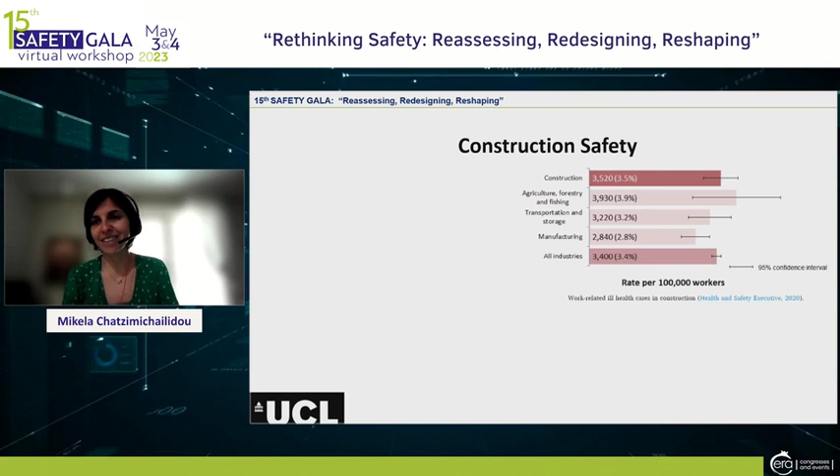Unfortunately, and this is why us safety engineers are very useful really in this industry. Some facts: compared to stick built, which is the traditional way of building residential buildings, modular construction has environmental, economic, and societal advantages. It's a very different way of building, more like a manufacturing process rather than the traditional construction process. Of course, as with everything in life, it comes at a cost, in the sense that any innovation should be considered from a safety perspective.

Because it may introduce some safety risks. Another fact I came across during this analysis, published by the United States Bureau of Labor Statistics, says that unfortunately there is evidence of increased injuries and fatalities in the US modular construction industry, which means that while it may bring major advantages, it also needs to be considered from a safety perspective.

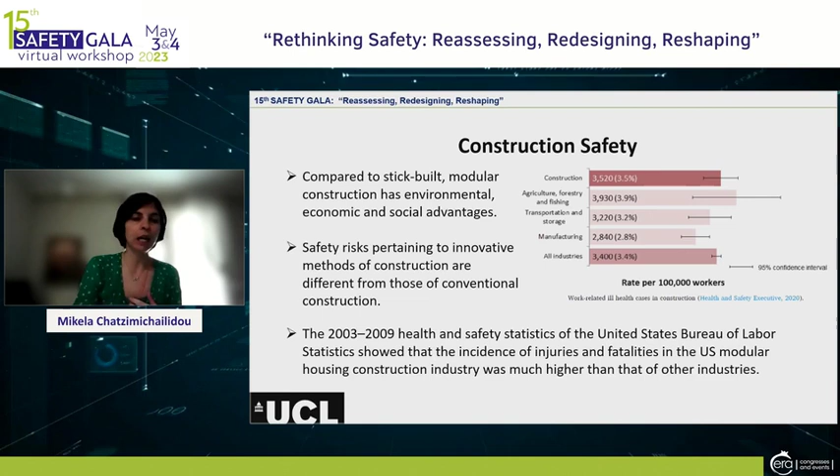And this is the main reason why we did this analysis at UCL. Touching on modular construction, as I said, it's more like a manufacturing process, like a production line. Consider it as Lego pieces: you produce a module, and by combining it with other modules, you can create all sorts of different buildings and layouts.

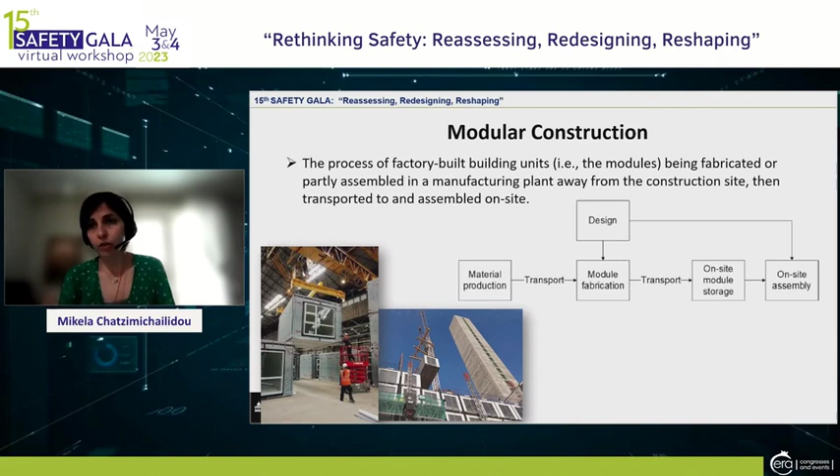There is a general process, though of course processes may vary from industry to industry, from country to country. A very generalized process, which you can also find in the paper, is presented on this screen. As I said, it's a typical production line process: you have the material production, which is then transported into a plant in order to fabricate the module, the entity which is then used as part of the production process to create the final building.

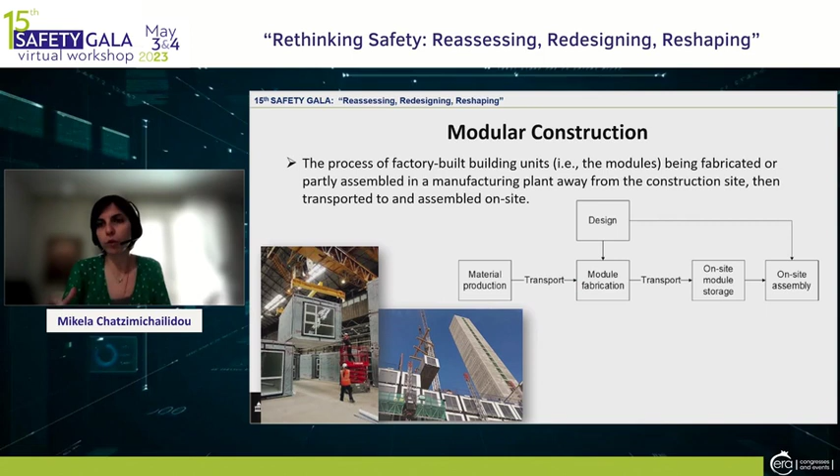And of course, you have design at the top of the whole process, which leads the entire process from a digital perspective. Building information modeling is a very extended topic in its own right, so I decided not to say much about it. I know different specialists in different industries experience it in very different ways. The only thing I want to highlight is that it's not only about CAD designs, because many people unfortunately tend to oversimplify it.

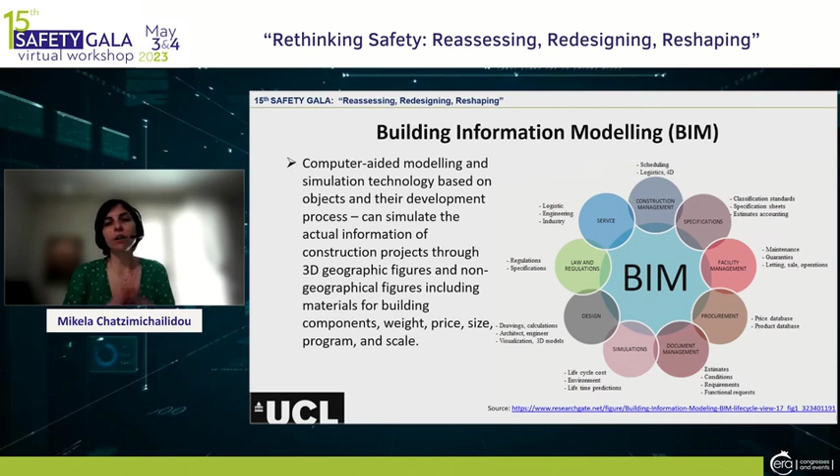It's much more than that. As you can see on the right-hand side, it encompasses laws and regulations, design, simulations, document management, anything really related to the production process of a modular building. And it's obviously computer-aided modeling, so keeping this fundamental about it.

So why is it so important? I already touched on why it's important to consider BIM safety management in modular construction as a topic of interest. There are a number of papers in the academic literature, as I mentioned, that consider the use of BIM in modular construction. Then they consider the use of BIM in safety management, and as a third, separate topic, they consider safety issues in modular construction. But they never consider those three together, which is actually where the power of BIM can be highlighted, because BIM can actually be used to remedy, to mitigate safety risks pertaining to modular construction.

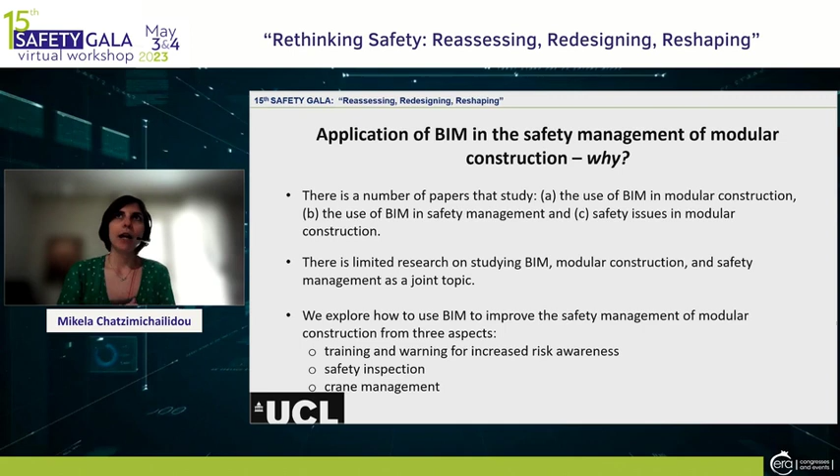As you can see at the bottom of the screen, from this literature review we have identified three major areas where BIM can contribute to modular construction. The first is training and warning for increased risk awareness by the building workers. Safety inspection, where we go on site, for example where the building starts being created, and run inspections with the support of BIM. And then crane management, which is another area with high safety interest.

So let's try and unfold all three separately, and I'll make a quick recommendation by category. First, training and warning for our workers. Offsite production of modular buildings, meaning while it's still in the plant during the manufacturing process, requires workers to master a completely different set of skills. It's not like the traditional stick build, so they need to upskill themselves around new skills in order to be able to produce modular constructed buildings.

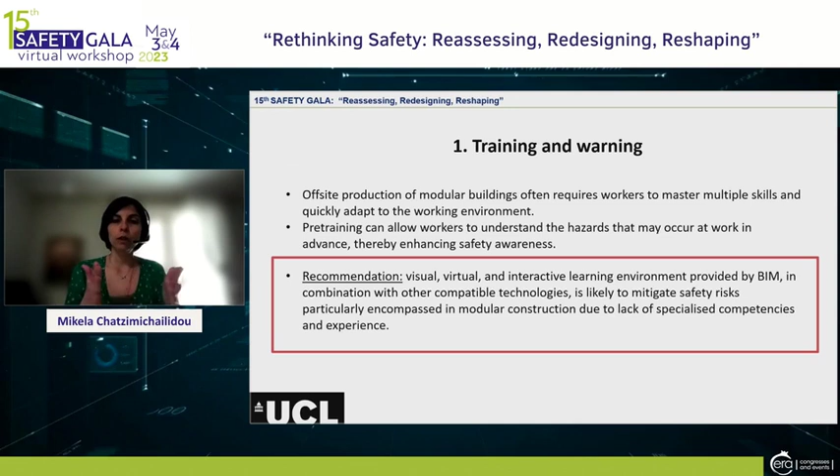Pre-training, as always, can help workers understand the new nature of hazards introduced with modular construction. The recommendation we made in our paper, after analyzing hundreds of papers, was that visual, virtual, and interactive environments, mainly supported by BIM, can serve this purpose. They give workers the capability to check new construction methods, understand the safety risks involved, and contribute to mitigating those risks.

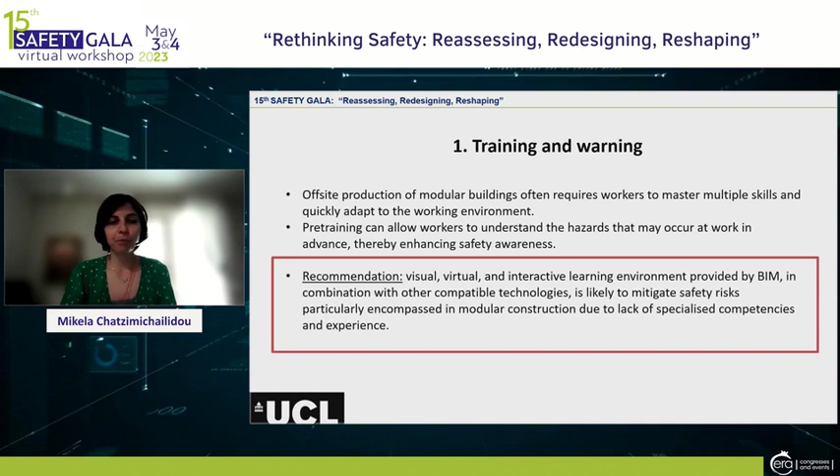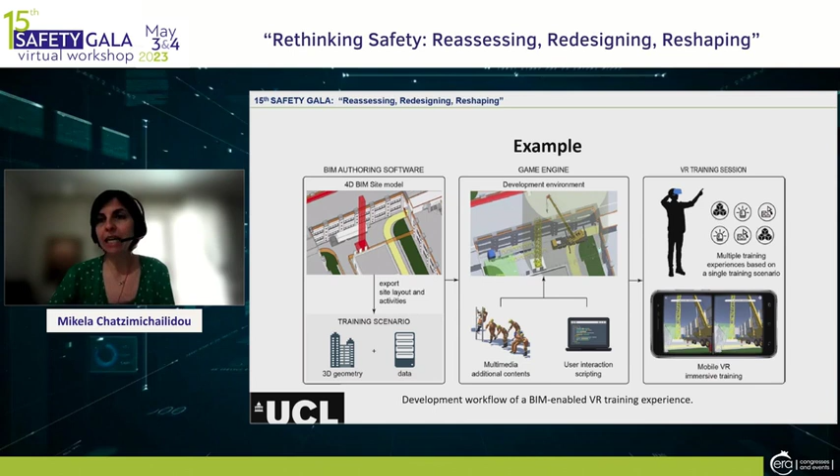The only thing I'd like you to focus on is, on the left-hand side, we have a typical 4D representation of the site with no additional complexity or layer of information. But as you follow the process to the right, you see that we add cranes, as shown in the middle of the screen. And last but not least, we also add the human in the loop. By using virtual reality in combination with BIM, we can create a dynamic, live environment where the worker feels the space and may feel the safety risk while being in this virtual space, which realistically represents how the building will be once built.

The second area we identified as one of the most important was safety inspection. It's vital during modular construction to understand the safety risks of this process as early as possible, mainly from a cost perspective, but also to mitigate safety risks for the people involved. After a module is manufactured and before it's transported on site, it needs to be monitored and inspected to see if there are any oversights or issues with the structure itself. And when the component is transported, it has to be inspected again to make sure all the modules fit properly and to ensure the safety of the building.

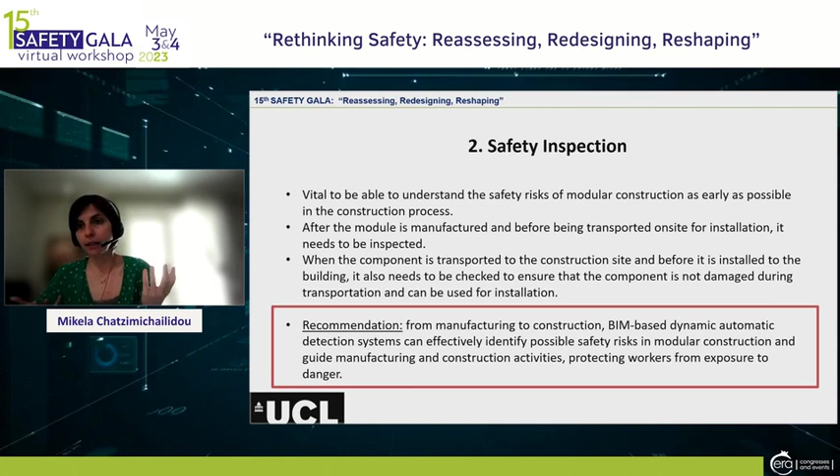So how can we do all these complex processes of inspection? Again with BIM, the extended literature review has shown that from manufacturing of the module to construction of the modular building, a BIM-based dynamic tool can guide us from conception to design to construction to delivery, to monitor all the safety risks involved, related to defects that the material and module may have.

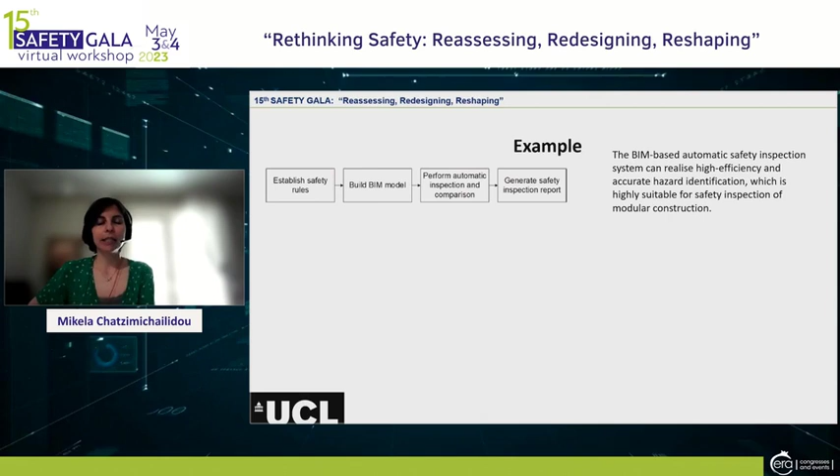As an example, I have a couple of examples, I won't go into much detail. There are different ways BIM can help us do inspection of modular construction. One is through a set of requirements. Because with BIM we're able to gather information from previous projects and combine it with information from the ongoing project, we can create a dynamic, history-based set of criteria and quality requirements to enhance a BIM model, which can generate automatic inspection rules. There are red flags which we, as safety managers, need to bear in mind for proactive safety risk management.

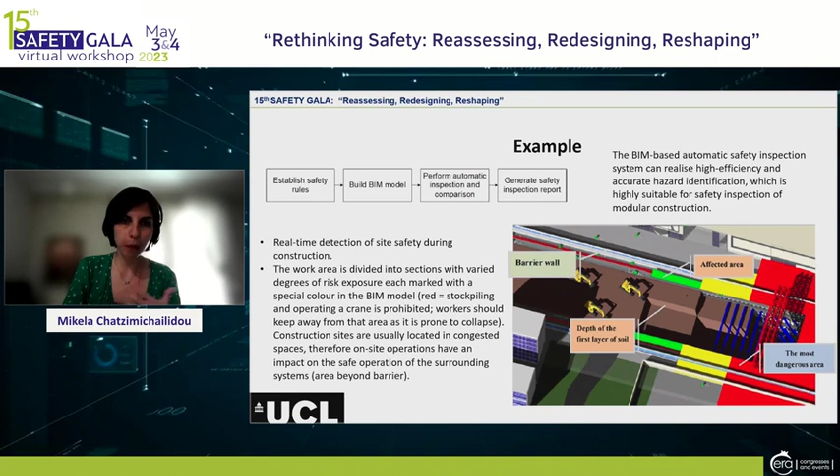There's much more information around those two examples, which unfortunately I can't go into due to time constraints, but please feel free to ask questions or refer to the paper. Last but not least, crane management. As I said earlier, each module can weigh up to 20 tons. It's massive, which means there is definitely a very serious safety risk that needs to be considered.

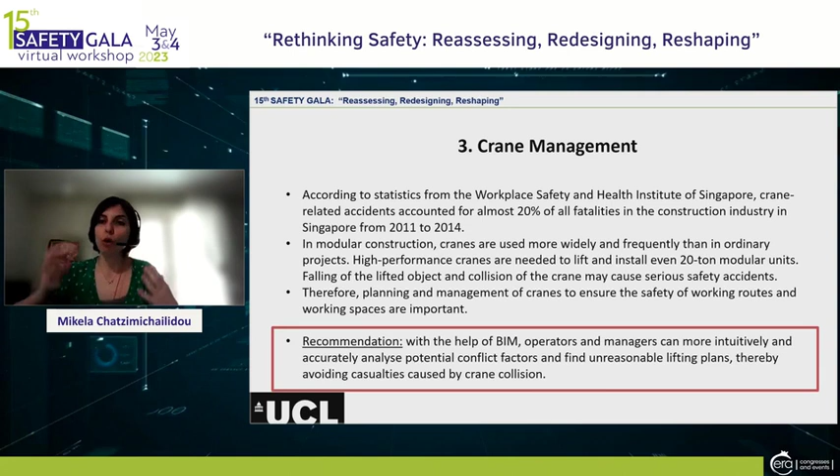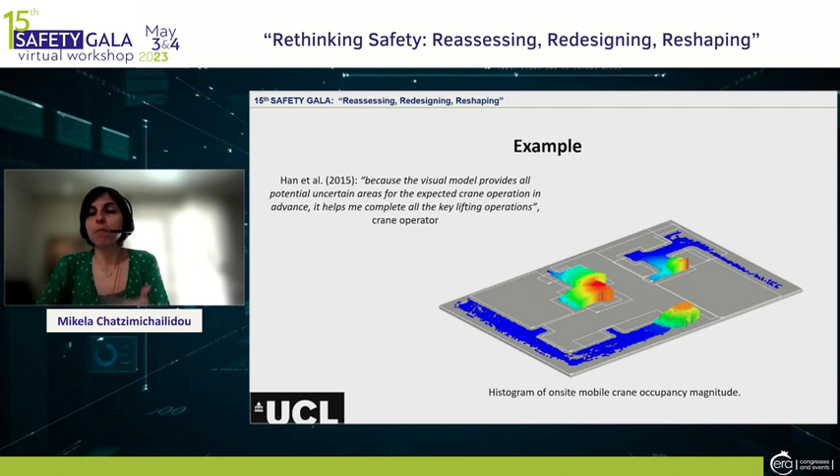There is positive feedback from different crane operators, because these tools have been used in practice and operators have provided feedback, either positive or negative. Here we have positive feedback that it made them feel more confident in the work they are doing as crane operators.

As I said, more examples can be found in the paper. More specifically, there are 74 papers being analyzed. You can find all sorts of examples with all sorts of levels of complexity, programming, and so on and so forth. So please go ahead and have a look.

To summarize this presentation, because there has been quite a lot of information to process, a few things I'd like us to take away: it's a completely different set of skills required from workers to deliver in the space of modular construction. It's by no means the same as traditional construction. It's very demanding in terms of planning phase, because it's different—more like a production line. So upfront planning, design, and training is highly needed.

And of course it's a complicated process. Large scale machinery, as I said earlier, to produce a 20-ton module, you need very, very big machinery to be operated.

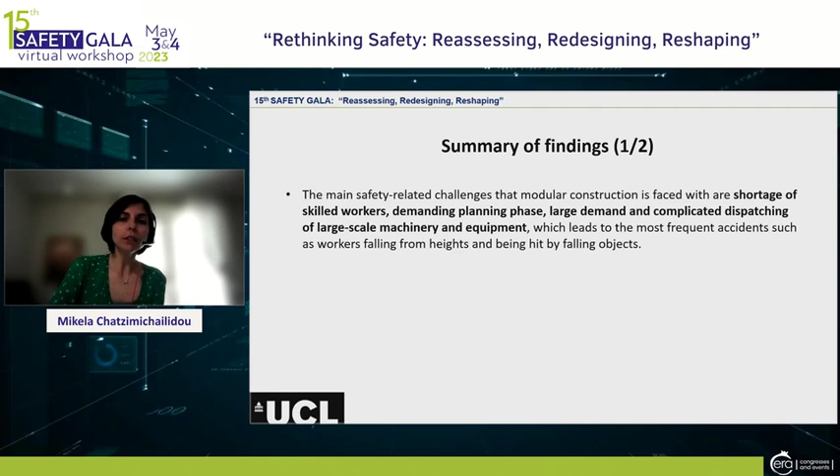As I said earlier, BIM is not a panacea, let me clarify that, but it seems to be one of the solutions we have available at the moment that sounds promising. It can improve worker safety and improve awareness of risk, because it's very important to be proactive. It gives us this visual sense of the space, and this enhances our safety awareness.

It can also generate early warnings. In some cases it can generate, say for example, a beep sound, so we can act accordingly. And of course we can check for conflicts in the planning phase, say conflicts which have to do with technical requirements, for instance. So it's not only about safety, but here we care about safety mainly.

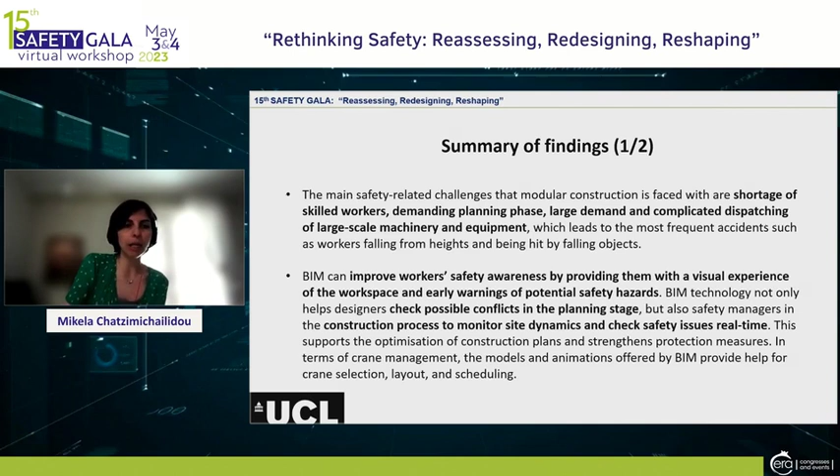Some final observations: this paper didn't consider material and equipment defects, transportation of modules, or damage of modular components, because it was out of scope—it was already a gigantic effort. So we stopped there. If anyone is interested, I would be very happy to see more work being done in the areas we haven't covered.

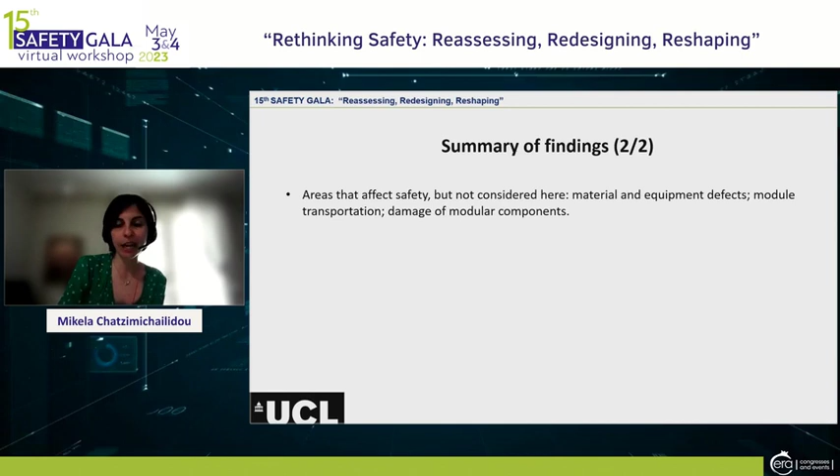Also virtual reality, which I briefly mentioned, geographical information systems, augmented reality—they are siblings to BIM, I would call them. They can complement each other in a very nice way. There are examples in the literature and in practice; these are used in my own company, Arup, in real life examples.

Something else as a recommendation, because I keep teaching at the university, I would like to see more material in the syllabus around BIM, VR, and all these new technologies, because these are not the future—these are the present, and they are happening.

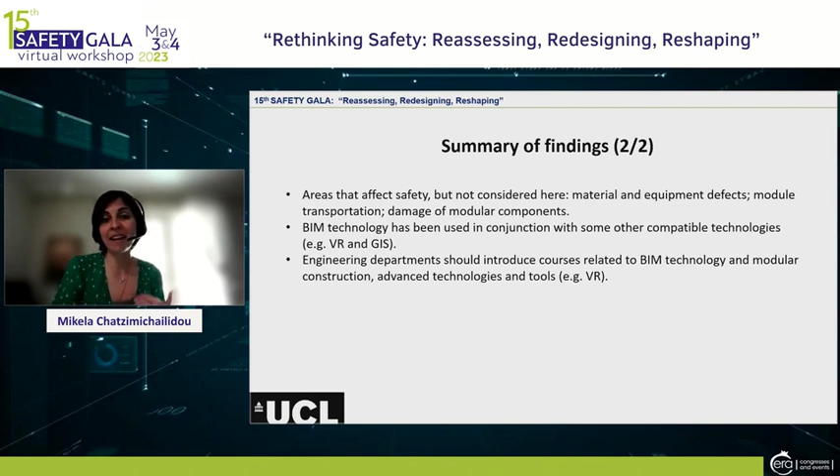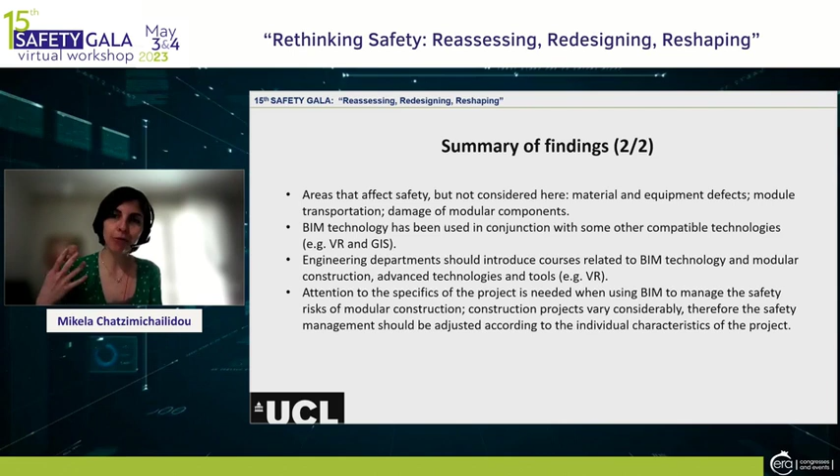Last but not least, you are already well aware that every project is usually a single project, so you can't replicate the same processes, the same thinking. We need to be very mindful of that, and not apply any approach in a hasty way.

And social value—I mentioned skills. In the UK, where I've been working with a major construction company called Laing O'Rourke, we have seen that we can also help underrepresented groups of people, say for example people who were imprisoned for a while. We can upskill them, reskill them, and bring them back to real life, to active life, and ask them to become part of this process.

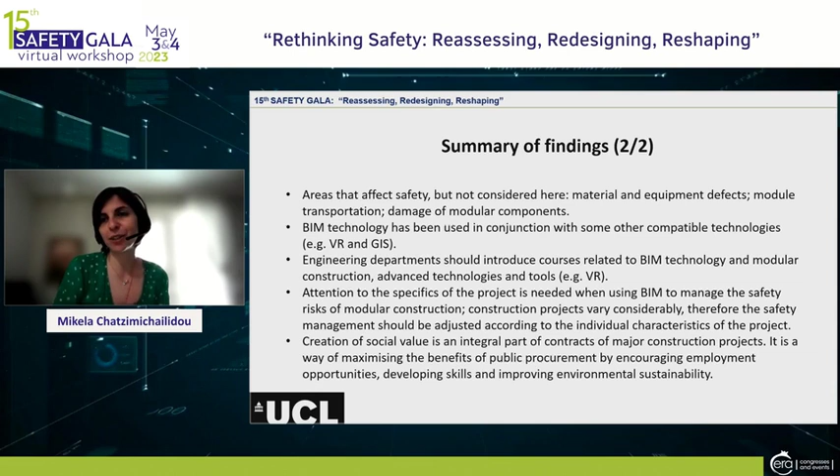It can also elevate societies that financially are not doing very well by building factories there where we can produce modules. So just to highlight that everything we do as engineers, and I'm an engineer myself, it always has to come with a social benefit. This is the last thing I would like us to remember after this presentation.

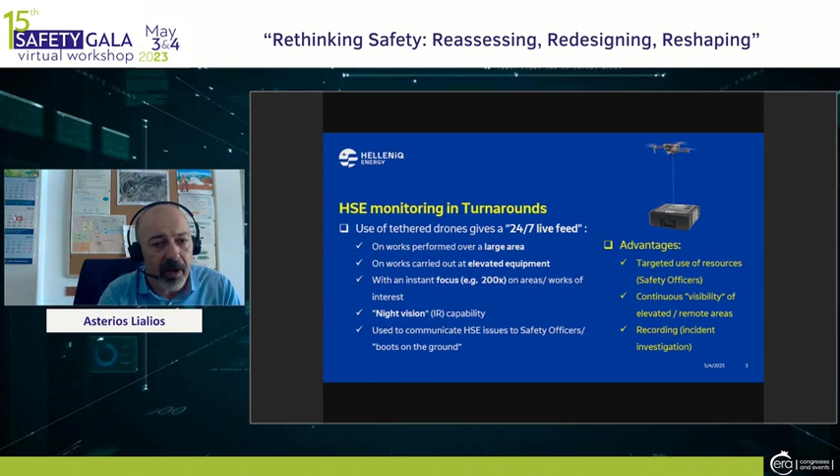Advantages include targeted use of resources. Officers are not just walking around waiting to see something, but are focusing based on information given by the drone operators. There is continuous visibility of elevated or remote areas, whereas in the old days this wouldn't be possible. And there is the possibility, the potential for recording, which is very useful, for example, in incident or near-miss investigations.

An obvious area is working at height. For example, visual inspections of refinery and tank farm lighting pillars. We have done about 150 pillars in less than 5 working days.

Visual inspection and level 2 NDT report, and visual inspection of lightning rods. Older lightning rods might have ionizing edges, which is more or less radioactive. So you don't need to expose people to working at height with cranes, rope access, scaffoldings, and all the risks related to that.

Optical and IR inspection of the refinery flare. Flare is, for those not familiar with the business, where we burn everything we don't need, and it's a safety system, more or less. This cannot be inspected during operation by a human, but it can be with a drone that can also use IR to see defects in operation and give a heads up to the maintenance team to acquire spare parts and skilled labor to do the maintenance during a turnaround.

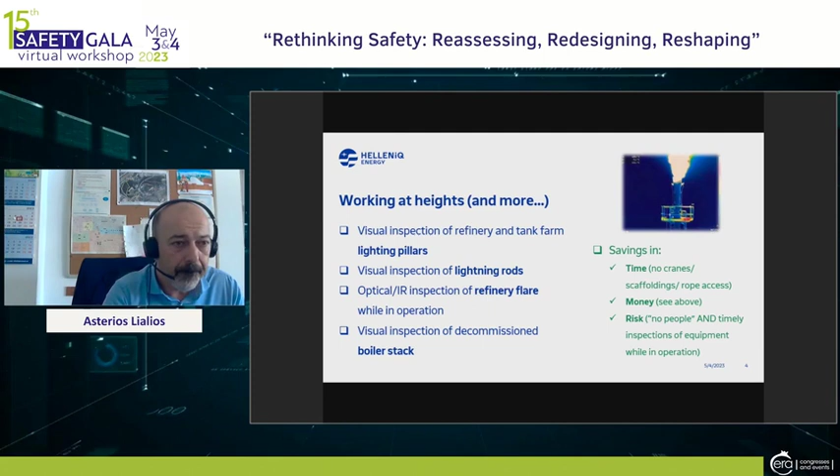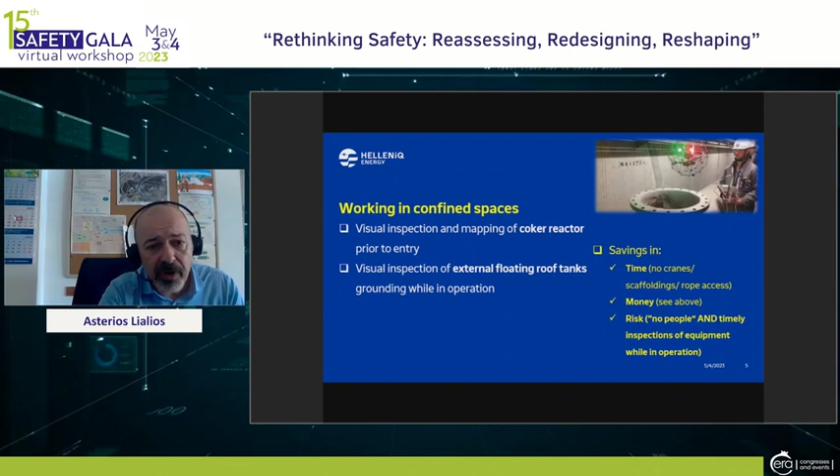We can and we are inspecting external floating roof tanks, their grounding, their connection to the tank shell, while they are in operation, using a drone and its high resolution cameras without having to go up and in, which is hazardous as a work, but also as a potential emergency. Again, we save time, we save money, and we reduce the risk.

Working underwater. This is in a pilot stage, meaning we have just started experimenting with this, using an ROV, like the one we see on the top right. What we can do is visual inspection of piers, water basins or pumps, which are both underwater and a confined space, not just open sea.

These ROVs have 2D or 3D image sonars. They have U-QPS, which is like the GPS for the sea, a robotic arm to move or handle small objects. They can do ultrasonic measurement in metallic objects, so you can have an NDT inspection. Water sampling for environmental reasons, pH sensor for the same thing, and an AR ruler, more or less a laser ruler, to accurately measure things underwater.

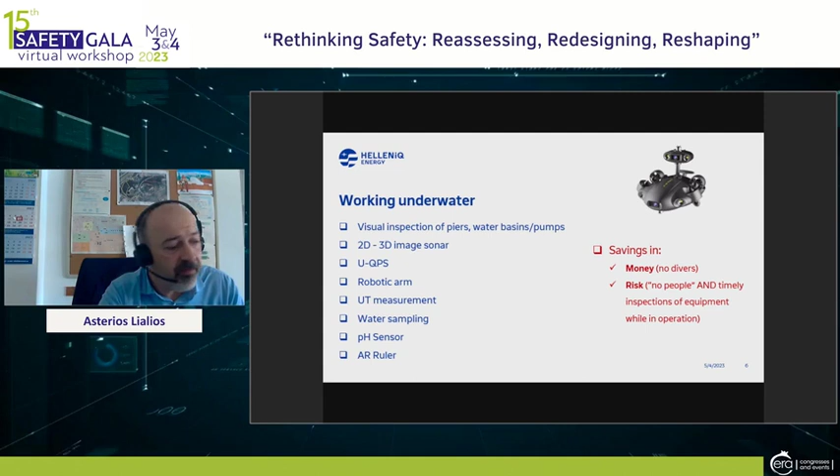We save money because divers sometimes also take time, but they mostly take money. And of course, a lot of risk, because diving operations are never risk-free.

Leak detection, that is more or less cutting edge right now. We have done a test which was positive, the results were very encouraging. An optical gas imaging camera, like the very well-known FLIR, mounted on a drone and coupled with artificial intelligence, which can detect volatile organic compound or noxious gas leaks while they're happening. And in contrast to doing it manually, you can easily access elevated equipment, pipelines or reactors, and you can do it many times a year, whereas with an operator or a technician, that would take forever and usually is limited to what is at ground level or at a safe access level.

This artificial intelligence can even detect leaks that do not emit gases, because it can compare with data analytics, comparing the picture before and after, and see that something that was gray, i.e. concrete, is now black because it has fuel oil on it. Obviously time, obviously money, obviously risk, and a great help to the environment.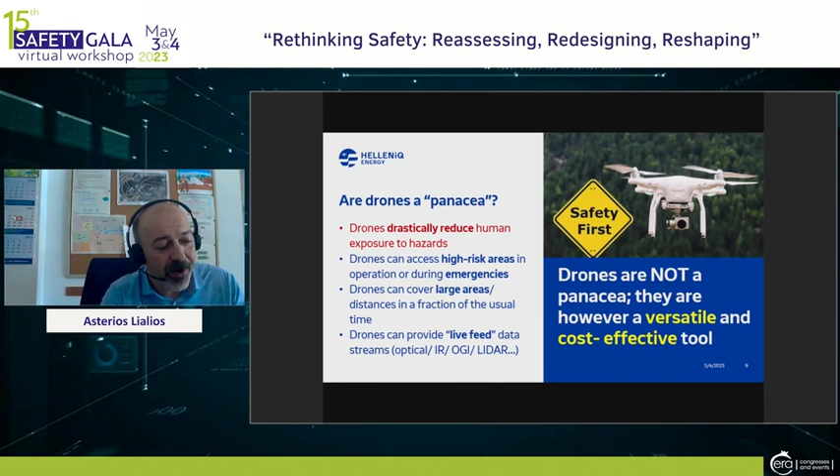You saved us 5 minutes from your presentation, so I'll take advantage of this to give you a question until the next presentation. What are the concerns or problems that you have captured so far from the implementation of this new technology? Thank you, Theodore.

One, for the time being, drones are not ATEX. They are not explosion-proof. That means that, with the exclusion of emergencies, for I believe obvious reasons where you weigh the risks, you cannot use them in potentially hazardous atmospheres, in them. You can use them around them, but not in them - flammable or explosive. You can use them in a nitrogen atmosphere, no problem.

Another problem is GDPR. More or less, you have to be very aware of potential issues with personal data, sensitive personal data, and the relevant legislation. You also have to be aware that in such an environment - not, for example, in the construction business, but in a refinery environment - there might be interference, electromagnetic interference, or obstructions from metal structures like a Faraday box, that may interfere with your ability to operate the drone remotely.

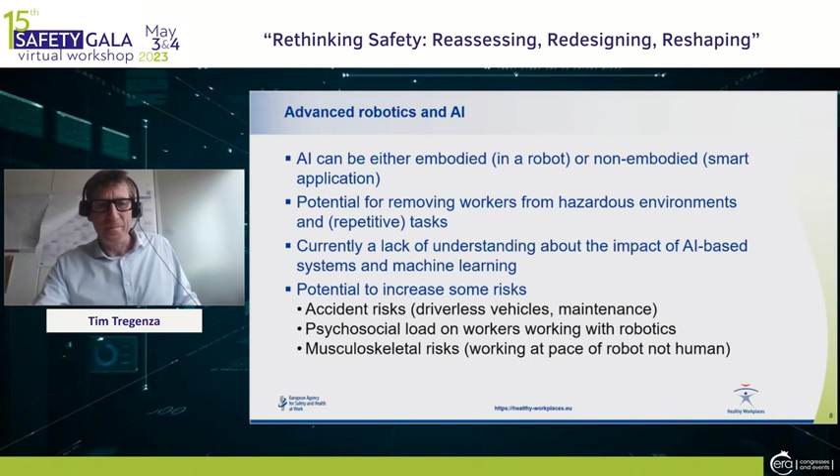New forms of worker management based on artificial intelligence. We hear stories coming out of non-EU workplaces, particularly about the surveillance of workers in real time by management, driven by algorithms. Potentially we can have early recognition of worker health problems and identification of bullying and harassment.

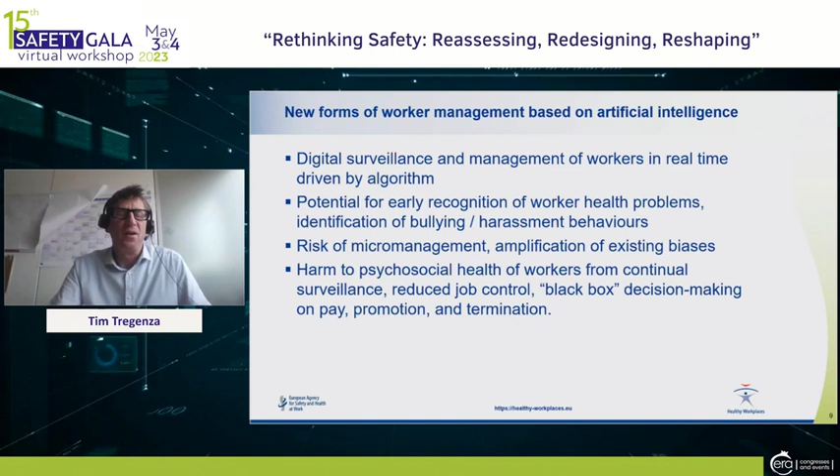But of course, we get the risk of micromanagement, amplification of existing bias, this black box decision making, surveillance of how often you went to the toilet. The worker gets stressed from continual surveillance, reduced job control. There's a lot of, if done right, excellent; if done badly, there is a risk of harm to workers.

So just finishing off here, my key messages: technology is a tool. It's not what it is, it's how you use it. We have to have an inclusive human in command approach. Artificial intelligence must support and not control human decision making.

Health and safety should be integrated into the development of digital technologies and its application from a design phase. Training and skills, again, we've heard this mentioned earlier, is essential for all workers. And the management has to include the impact of digital technologies in their prevention approach.

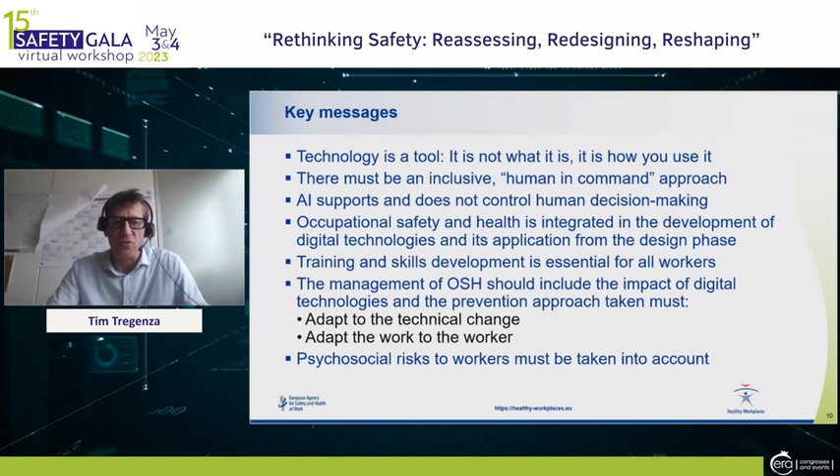As it says in the directive 89391 EEC, the employer must adapt the work to the worker, and they have to adapt to a technical change, but they have to review their risk assessment to make sure they are still protecting their workers. This means in particular the psychosocial risks of the worker.

So I will finish here. There's some links to our publications I've mentioned, but I will be glad to answer any questions. Thank you very much indeed.